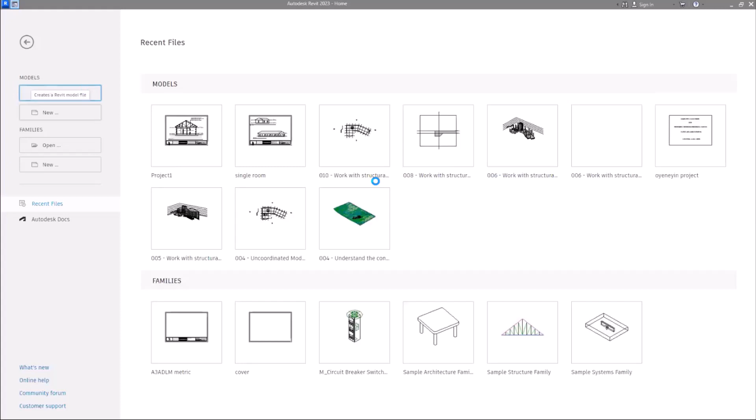Now let's open up and create a new file. For those that are new here, to open an existing project just click on open here. Any project that is not on this recent page, click on open, and it opens your documents, your file explorer. Pick the project and click open. Make sure they are all RVT files, Revit files. Once you click open, it allows you to open RVT files. Take note of that.

But for now we'll be starting a new project, so that was new. Remember, we make use of metric architectural templates for projects. It takes a bit of time to respond because it's a very heavy software, actually.

Okay, we are good. Now we'll pick up from where we stopped yesterday. I explained yesterday that we have the tabs up here and the ribbons down here. Those are tabs and ribbons. I'll come to the insert tab. We were able to discuss the first five tabs yesterday.

Now, under these inserts, this is where quantity surveyors would mostly work, or BIM managers, because at this stage you'll be linking various models from either your architect, your structural engineer, or your mechanical or systems engineer. Under insert here, we have the first ribbon aspect, which is link. Now we can always link a Revit file. Let's quickly try that.

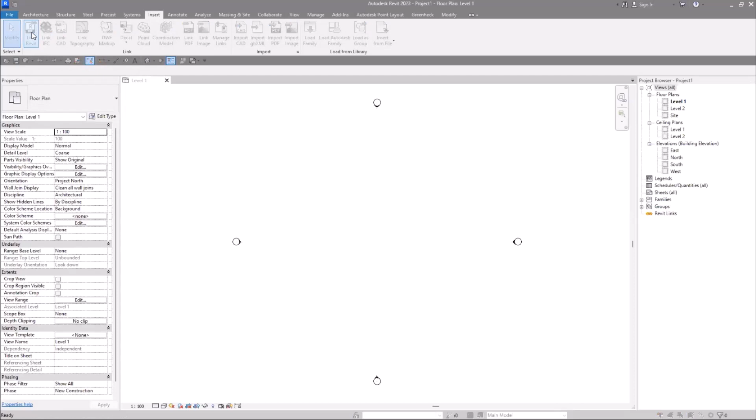Once you click on this link here, and you have an existing model, it opens up your file explorer. So I'm linking this simple project here. Let me just quickly link this concept design.

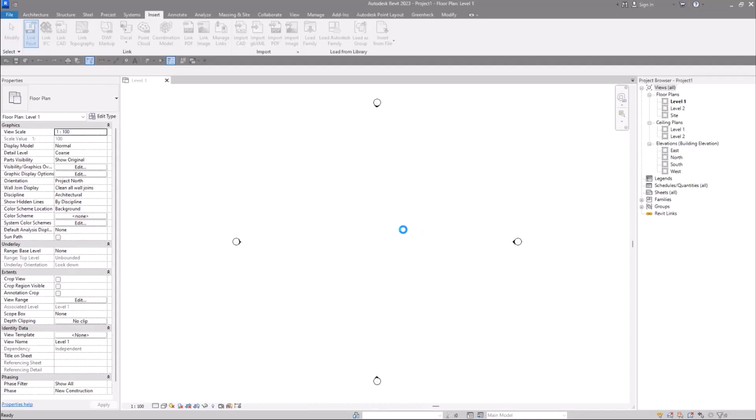Let me quickly open this up. Once you click on link here, it links it. So once you get your drawing, design or model from the architects or any other person, and you want to create your own separate file without tampering with the architect's design, what you do is link the model. So you see, it's not the model itself, it's a linked model you can use for clash detection and analysis.

You can now link the structural design and systems models also. You can link as many models as possible into your single Revit file. That is what link Revit is for. The other advantage of link Revit is that the link option allows your models to be live. I will explain more on that as we proceed.

Now let's look at the next option, link IFC files. I explained yesterday that IFC file is the standard of design put into place by the ISO, the International Standard Organization. There is 19650, which allows software developers to develop software that can easily collaborate and work within all software easily. For example, if the architect or lead designer uses SketchUp, you won't have to tell him it's not easy to complete an information-rich model.

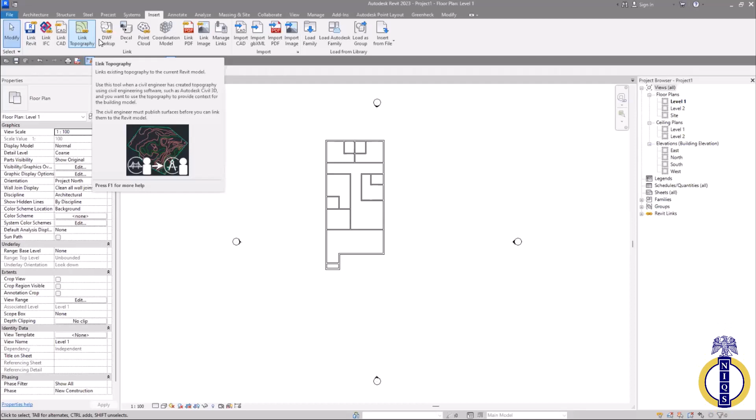Then DWF markups, that's a version of AutoCAD also. Then decal is image browse, you can always link that. Then you can also import from Point Cloud, that's the cloud of Autodesk Cloud space, that's Point Cloud. And you can link a coordination model.

That's the Navisworks document or Navisworks file. Once you have a model that's been saved on Navisworks documents or Navisworks cache file, you can link it up into your Revit model. So models created on Navisworks are called coordination models. You can take that down.

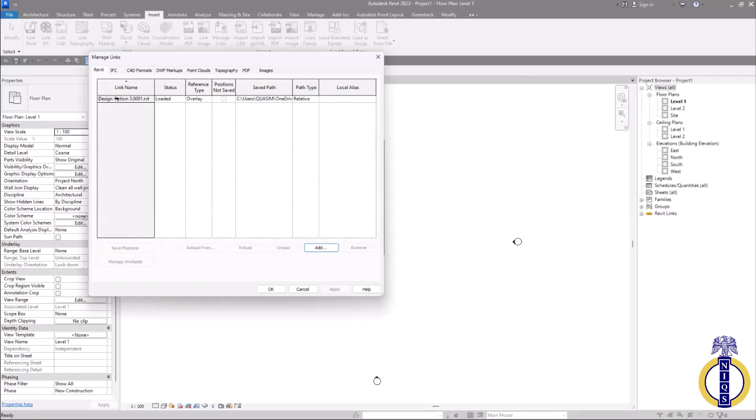You can link PDF files, you can link images, then you can also manage the links. On this manage links option, you will see the links for all the files you loaded. Once I click on manage link here, it gives this dialog box. With this dialog box, I can see the link model I linked, which is this Revit file. So I can reload it, unload it, or make some other adjustments, but that's a more advanced section.

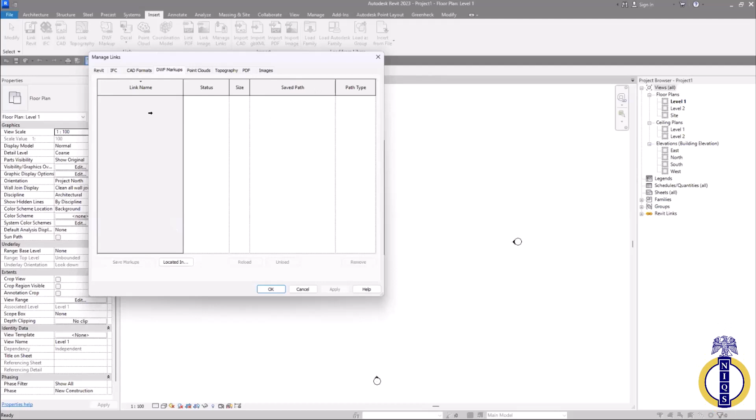Then IFC files also, you can do that, CAD files, DWF files. So all of that, you can always load them in and make adjustments to them. And we have the next aspect, which is imports. Under this import, you can import CAD file, GBXML, PDF, and image. Now let me explain the difference between link and import.

In an older version, you were able to import Revit also and import IFC, but now those feature options have been removed. When you link a model, it is a live model. That means the architect or engineer can go into the model from his own end and make adjustments. Once an adjustment is made on that model, once you open up Revit software, it will tell you an adjustment has been made on the model.

For example, after you've done your quantity takeoff or quantity extraction from Revit software, and then there's a change in design or an adjustment made on the 3D model by the design team, instead of going back and starting your quantification process from the beginning again, what you do at this stage is reload. Once you open up the Revit software, it tells you an adjustment has been made. You just reload it, and once you reload, it will update all your quantities immediately without any stress.

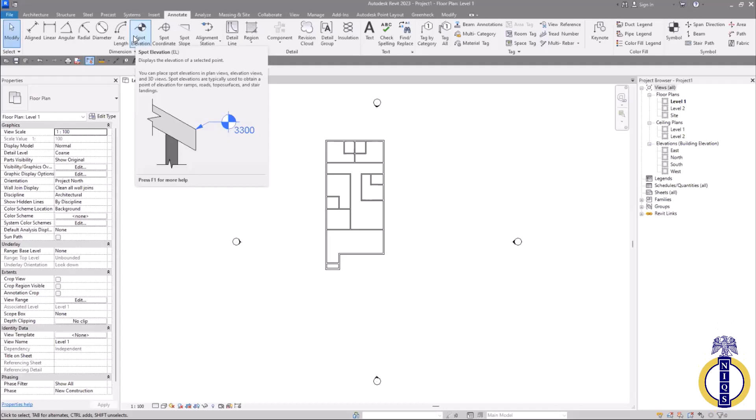Now, spot elevation. If you want to calculate the level of a particular surface from the ground level, that's the zero level, natural ground level, you might have designs where you have undulating floors, where maybe the living room area is at the normal 150 slab level, while the interior, the bedroom and all of that, is a little bit elevated to maybe 300 or 350.

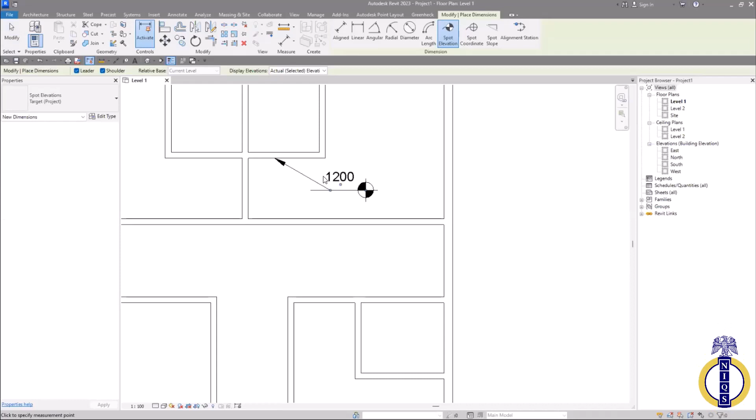That means that's affected the thickness at that point in time. So you can just use it to go through. Once you click on it, it will give you the feature. Once you just check, like for this, see my walls and all of that. So once you click on it, you can get the spot height for this building or these elements. Okay, that's just about spots.

Then the coordinate also, just to get the spot coordinate, works the same way as elevation. Then you can get the slope, alignment, and all of that.

Now for details, if you want to give instructions or notes, you can use this detail line here. Once you click on this detail line, designers use it for giving annotations. By the time we start making use of all of this, you'll see. You can just draw a bit of an arrow like this. Once you do that, just press escape to cancel.

You can also type a text here, and give the instruction you want to give about that particular surface to either the design team or anyone that has to do with that particular aspect, even the client also.

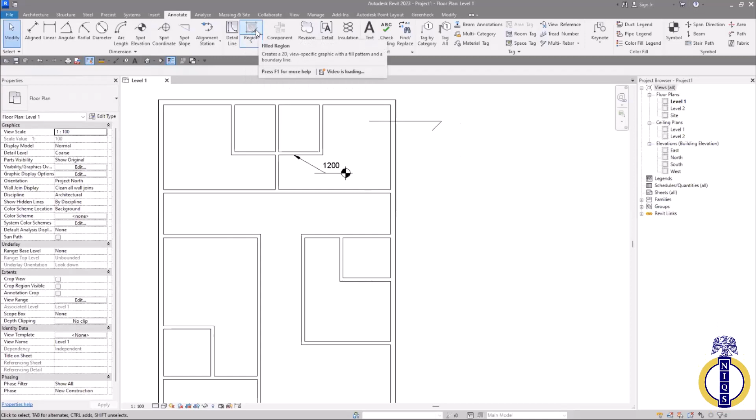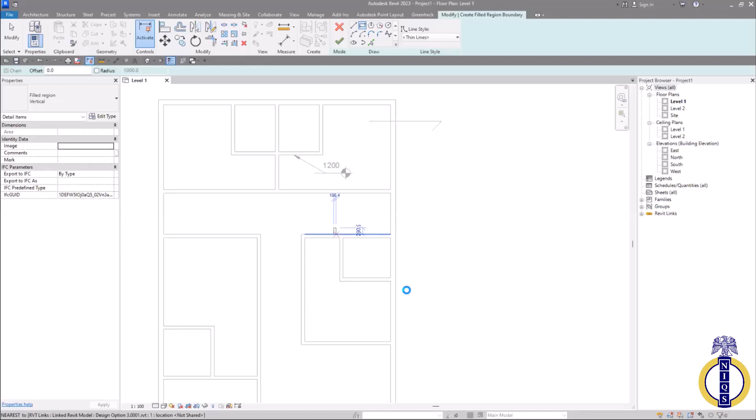They have region. This region is to shade a particular region. So if you click on this region here and click on this draw icon, once you click on any of these tools, it gives us a different page entirely, which will still come to, but I just want to quickly do a run through. So you can just click on this rectangle here. Let's give information about this region. I'll just click the first end and the second end of the rectangle, which is here. Once I do that, just click OK. And see, it's filled already. It has this here.

Now with this, once you fill it, you can just give a text, come down to text here. Just type a text and give the instruction about that particular spot or space.

Then we have the next tab here, which is text. Revision Cloud also is just the same as giving instructions. The model group, the insulation is used by the design team, mechanical team, to give insulation designs on the sections and all of that. Now text, quickly type on your 2D view or something.

Once you just click on this text here, it gives you this new cursor. You see the cursor has a sign, that's the text cursor. You can just click on the surface where you want to type and just type, closed area. So when this is off, just press enter and escape.

So see this here, once any other person in your project team or design team opens this up, say, oh, you've given an instruction, this area is closed or something. So that is one of the advantages of this detail annotate space here. You can always verify your spellings, word check, find and replace, and all of that. Just that same basic tools that Microsoft Word does, all of that has been integrated into Revit software also.

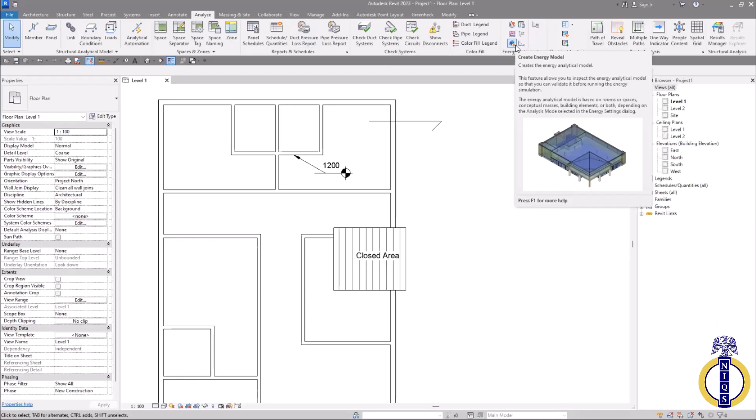Okay, when you're carrying out MEP designs and all that, the principles that will guide you in creating the air terminals and all of that is based on this energy model here, that's under energy optimization. Electrical analysis also, then path of travel for the design team.

The next tab we have here also is the massing and site. Now for massing and site, like I said yesterday, just to give a concept of what you want to design, conceptual mass. See those funny looking buildings that have very complex design, complex shape, and all of that. All of that were achieved all because the design team were able to design conceptual mass.

It is now from this conceptual mass that they had the other features of the particular design they intend to go about, as the floor. They can, after you've done the conceptual mass, you can now model by face. That's how your walls, your floors, your roof, and curtain walls. Just place it on the model that you try to design, and that is it.

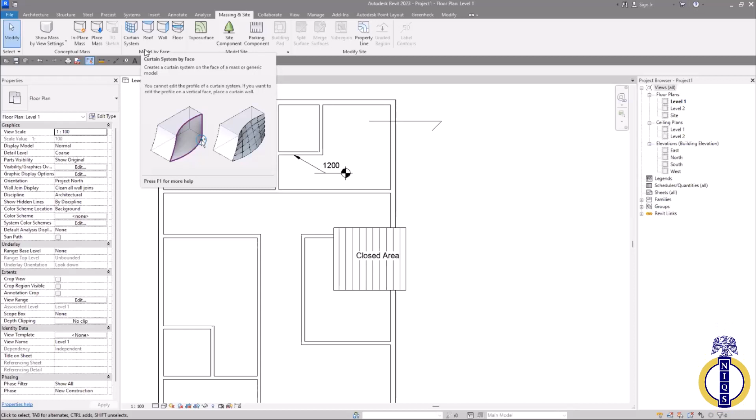From there, they start doing the interior partition and all of that. Now, model sites. This is one of the first things you do once you get your design. If you have to, after getting your brief, do a design, you have to try and model the site and all of that. So you have the topo surface, that's the site surface, site components like trees, chairs, and all of that. Parking components also. Then modify site, so you have a property line, that's your boundary.

Now collaborate. Like I said, Revit is one of the most powerful BIM tools. One of the major reasons is because of these collaboration features that it has here. Now, someone asked a question yesterday about how do you know who made adjustments to your model? How do you know who is working on that particular model and all of that?

Now under this collaborate, we have communicate. Now this is not a shared model, that is why this tab is inactive. For shared models, the communicate tab is always active, where you can now send your editing request to your BIM manager. Now there's a difference between a project manager and a BIM manager. They are two different people. A BIM manager, let me quickly check this in, is someone that manages all the designs and models on the construction project.

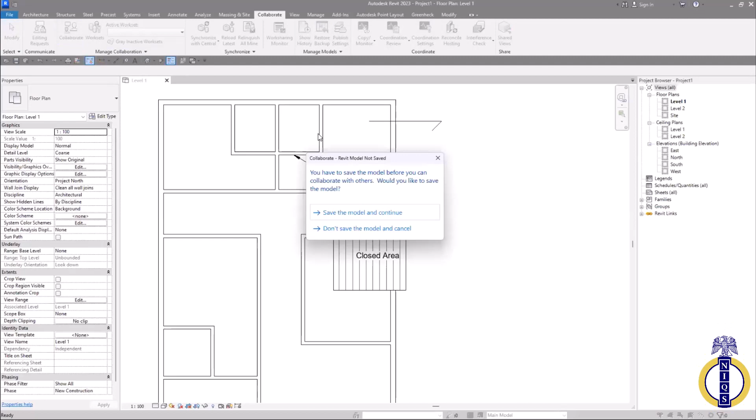You see, the model is not saved, so I have to save the model. Let me quickly save what we're trying to work on. Let me save the model. I'm trying to open this back up.

Okay, while we are waiting for the file to open, if you have any question, you can still ask the question so that we will continue from there. Please, Kasim, just hold on a minute.

No problem. I have QS Okechukwu Victoria. You raised your hand, you might proceed to ask your question if you have a question. Otherwise, we'll move over to QS Adegoke Akin. All right, QS Kasim, you can continue with the training, please. Okay, sir.

Taking a second to move on. Hello sir, yes sir, go ahead. Okay. This training we are into now, is it possible for a quantity surveyor, after maybe an architect sends a particular drawing, can he readjust a drawing for an architect?

Thank you, Mr. Adegoke, for that question. Yes sir, it is very important that in a professional situation or professional environment, it is not proper for the cost engineer to adjust a shared model. Do you understand? You have to send your request to the BIM manager on that project. So it's now the BIM manager that will send your query request to the architect or structural engineer to make adjustments to the model. So in a professional setting, there is usually a BIM manager, someone that you report to, that says okay, this is what has happened from the design team that you want them to make adjustments or to correct.

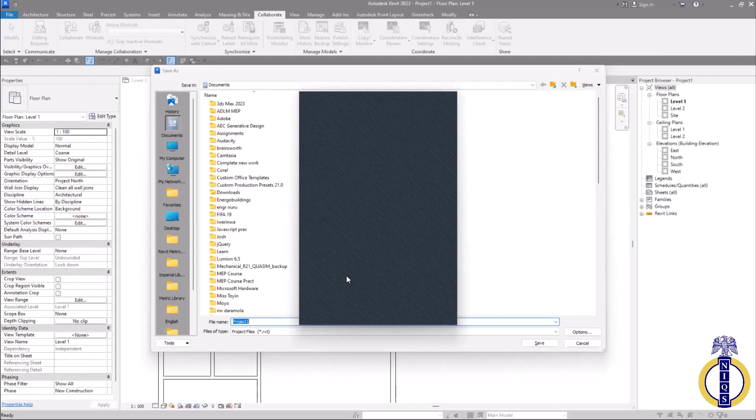So it is now the BIM manager - the architect also would have to meet up with the BIM manager or send a query request to the BIM manager that he wants to make adjustments on the particular design. So that way, once the architect makes the adjustments, the BIM manager sends to the entire team that, okay, an adjustment has been made by the architect. So once the adjustment has been made, then you can now move into that.

Let's proceed. Now I said I want to save this. Let's just save this file as NIQS training, NIQS FCT. Okay, so just save the file.

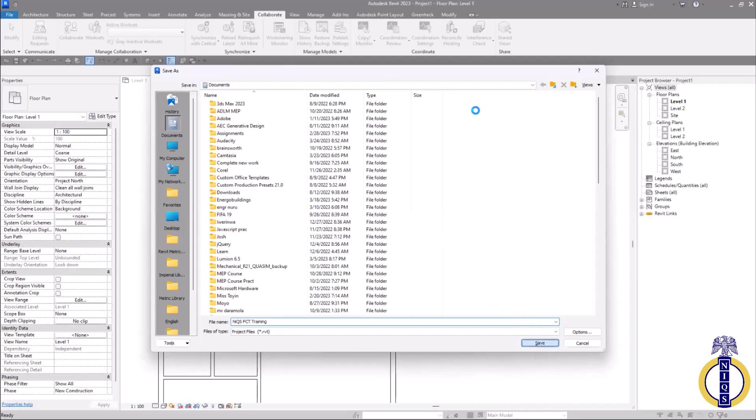And Revit is a very heavy software, so it takes a bit of time to load some features. Somebody actually asked a question that is very interesting that we note also. And that question is like this: he said his organization is using Microsoft Office 365, and he's asking, when somebody is doing collaboration in Revit, whether the person can also have access to it in Microsoft collaboration tools. It's important to point out that almost all of these tools have their own collaborative cycle, and those cycles are not overlapping. When you're collaborating in Microsoft Word or Microsoft cycle, it is different from the collaboration in other application spaces. So the collaboration cycles are not overlapping, they are actually disconnected because the applications are not the same and are not doing the same function.

Now, we were discussing the collaborate section before the break, and once we clicked on the collaborate button, we had to save the model. After you saved your model, this option came up.

Now we have the question, how would you like to collaborate? Is it within your network or in the cloud? Within your network is for organizations using a LAN network, that's a local area network. So everyone connected to your company's Wi-Fi would get to see that model on their Revit platform. That is within the network.

While within the cloud is if you have a situation where the architects or the QS or any other person are not within that office environment on that internet or network, then you can share on the cloud and the link will be generated for you to share your models with them.

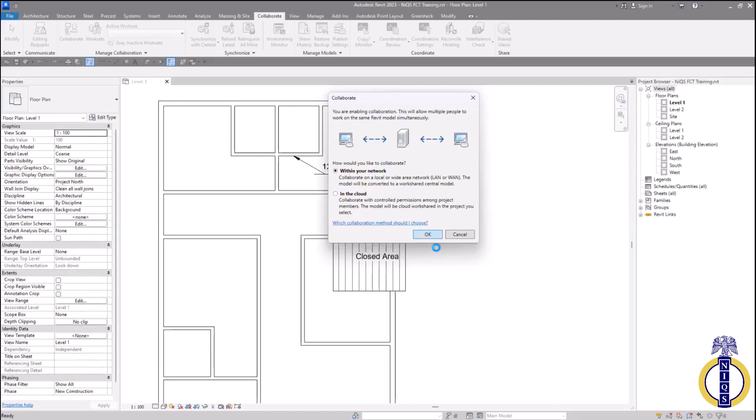So those are the two methods of making your models BIM compliant or creating a collaborative system for you to work with. So if you have within your cloud, just click this, or within your network rather, then next, to give you the next prompt.

That will be more of security features about the project. So once you fill all of that in, down here, once it's enabled on your project, you are good to go.

Now you see this sheet, it is no longer a dead model. It's now a model that can be synchronized across everyone within that network. Okay, now you can collaborate.

Now it's currently collaborated locally. Now you can see this edit request, it is now active. Initially it was grayed out, but now it's active because this model is now being shared.

Then you can now move this to the cloud if you want to. Then you have your work set.

Now you see this edit request here. If you are the BIM manager, once you click on edit request, you would see all the pending requests on that project. So you can either grant the request to make those adjustments or deny. As I'm saying, you are like the check and balance at this stage.

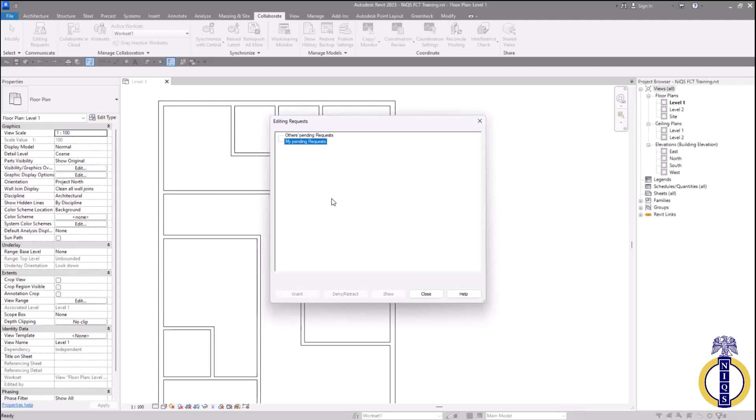Okay, then close. I have the next one here, which is worksets. Now that is worksets here, we have this sheet we are working with. Owner is me, this is your Autodesk user ID. This is what you're seeing here, so visible in all view and all of that.

So we have several worksets. You can share your grids for structural engineers, just share your grids to them. You can share your families also, you see all the families inside the project. Then you can share your views also, so you can pick what you want to share to everyone.

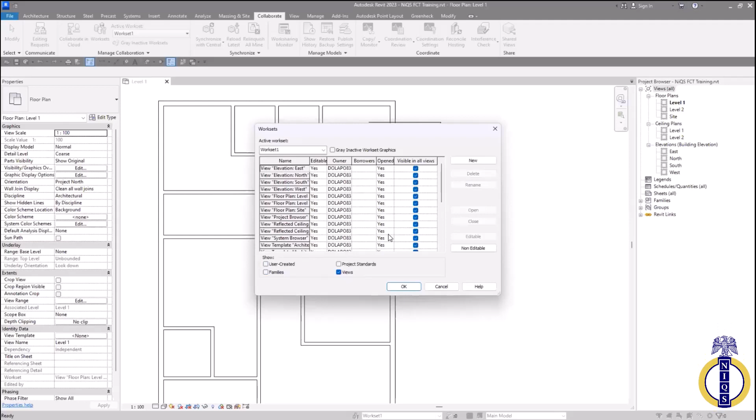So once you click on this, then you can share it. Now once you click this, you have the elevation, all the views, elevation down to floor plan, 3D views and all of that, they are all here. And the owner, that is the architect or who created them, and they are all opened. Do you understand? Now that's how to share. Just click OK, and this information is being shared amongst everyone on that local network.

Do you understand? Now we have this small drop-down icon here which shows work sharing, make editable controls. So once you turn this on, your project is being shared amongst everyone within your local network. While for cloud network, it will give you a link. Once you send the link to every other person, they download and use it for the analysis also for their design. That's for cloud.

Now, this is the central model, that is why this synchronize with central and reload latest is grayed out. Now if you are on the other side, that's the receiving end, where the BIM manager or the architect has shared a model link to you. Once you do your own analysis, that's you create your own 5D design on the sheets here, you can now synchronize with central.

That means the entire design of the model you worked with, once you synchronize with the central, you have updated everyone that you've done your own parts as the 4D or 5D professional there. Then you can reload the latest file if there's an adjustment made. Then you, as the one sharing, have to relinquish ownership if you want to.

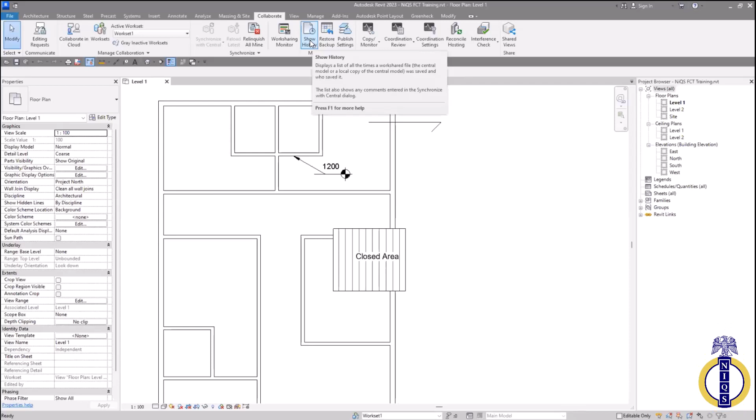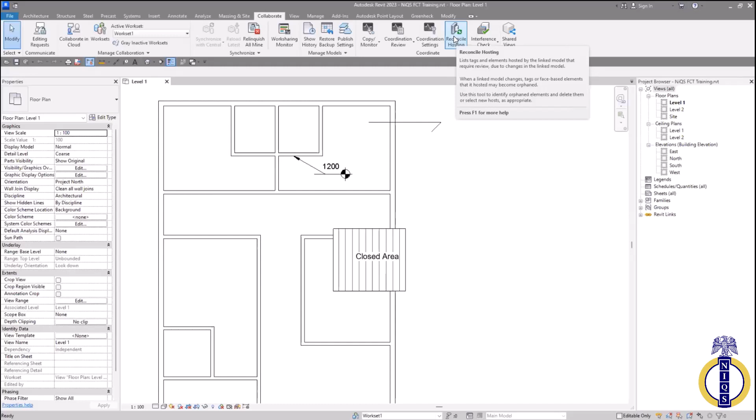Then as a BIM manager, you can create backups and all of that. It's a very wide experience. They can always publish your settings to the entire team. The other coordinates here can copy, monitor your project coordinate settings and all of that, so all of this is under coordination setting. As a BIM compliant professional, you should be able to have in-depth knowledge, but time will not allow us to go in-depth into everything because we have so many things to cover. But you will be able to have in-depth knowledge on how to use all of these collaborative features, setting up the cloud features and all of that within your workspace. It makes your work very, very easy, you don't have to stress about calling the architect all the time to send drawings. So as a quantity surveyor, your work is easier at this stage.

Let's move to the next part, which is view. Under this view, basically how to set your view, we are going into design. You have the view template, under graphics, how the view looks like and all of that. Then presentation, that's the 3D rendering and all of that. Under this create, you can create your own 3D view, sections, callouts, plan, elevation, duplicate, legends, schedules, all of that are created under these views. You can create various forms of view, your drafting view, that's for sketch, and you can duplicate your existing views also. Then for sheet composition, create your sheets that you want to compile for documentation to print out and all of that.

And we have windows here, various tabs in the user interface. Now come down to manage, which is the next tab. Under this manage, we have the settings, basically used by the design team to set the materials, the object styles, the project information. If you want to check the project information, just click on this. You can set the organization name, that is your company's name, the description of your company, the client, and the building name, that's the proposed residential building. Who is the author? That's the architect.

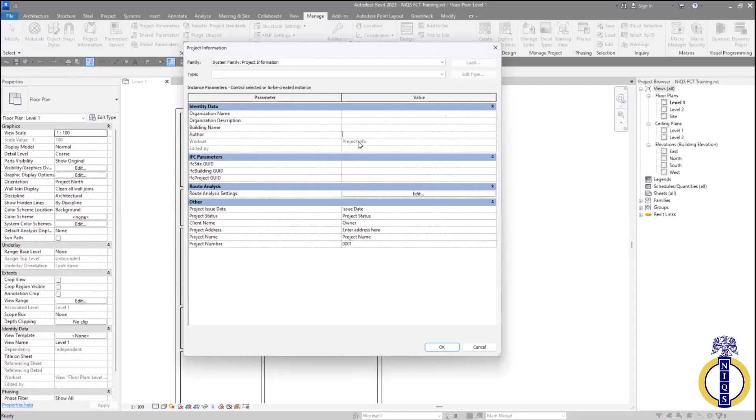Then IFC parameters, this is when you are sharing across various softwares also. You can input the GUID information also. Route analysis settings, the project, the dates the project was issued, project status, either completed or ongoing or at design stage, you can always input that. The address, the project name, and the project number, so all of that has to do with project information. Input all of this here, click OK. So your project doesn't just have a saved file with a name, it has all of the project information and parameters inside it.

It's very well, this is a new innovation.

It's not just the drawing aspect anymore, but the design team has to give an information rich model. You understand the definition of BIM today? It's the process of building an information rich model, not just designing randomly. Help you understand.

Now we have the project parameters, the shared parameters, and global parameters. Shared parameters are the parameters you are sharing with other design team members or other members of the project team. Global parameters are parameters you can get from the website or from the IoT, Internet of Things. That is where you get the global parameters features.

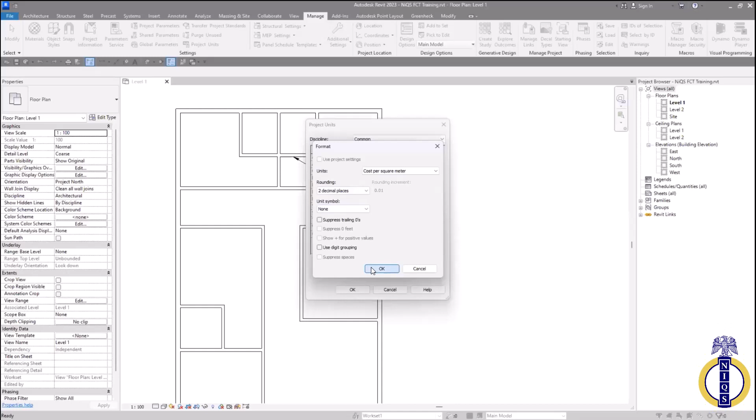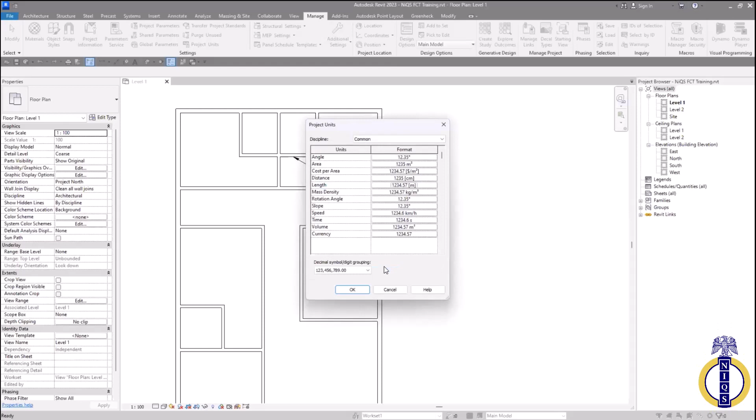So this is how to change the project's unit. If you received your project in meters and feet—let's say the design team designed and used feet, and you got confused when you opened the project in Revit—the usual solution is: just come to project units, under the manage tab, project units, then change the length, just change to meters, decimal place. You will now have a design that you are more familiar with.

Structural settings for structural engineering work, MEP settings, panel schedule settings for electrical panels, then other settings. Now there's also a project location.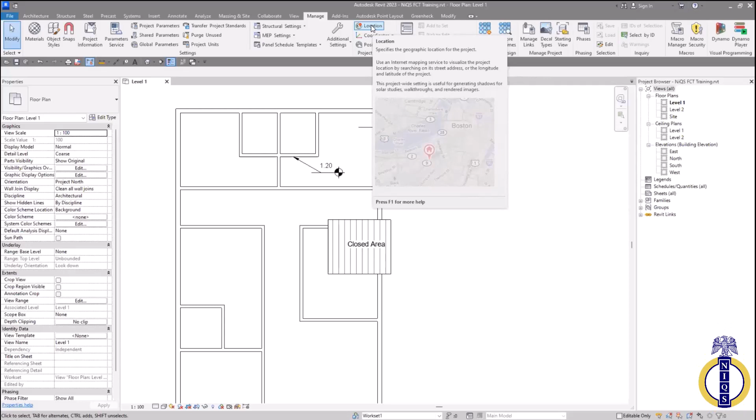Now another advantage of Revit 2023 and 2022 upwards is that you get live information about the site parameters, the site features, what is going on at that site at that particular point in time, satellite imagery and all of that. So once you are creating a design or project, you get in-depth location details, the most recent information about that environment, the weather details, the site condition, the floor condition—everything you get from the location details. You can either type in the coordinates, and it will take you there immediately.

Then the next part is position also. Let's move to the next part, which is the design options. This is usually used by the design team to make adjustments to your designs. Then generative designs, that's for advanced designs. We have manage projects, so you can manage your project links, the decal types and all of that. This is basically used by the design team, then the programming team also.

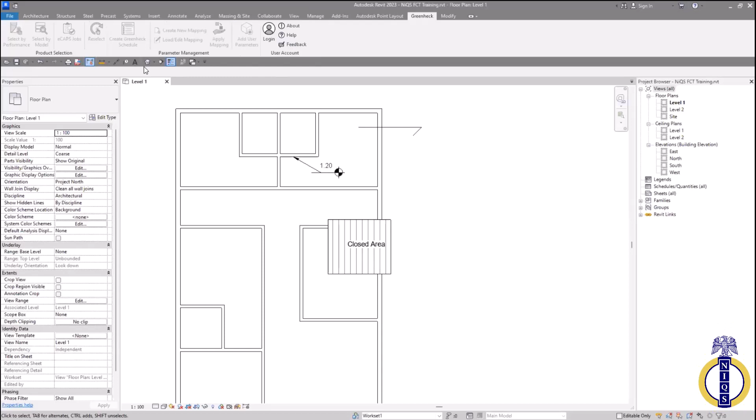Then add-ons—if you have add-ons installed, there are various add-ons that can help make your work easier and smarter. So we have various add-ons developed by various developers, and you can always purchase those add-ons or get them for your organization. This is Autodesk Point, this is an add-on here—Autodesk Point Layout and Greenbeck. These are various add-ons; Greenbeck is for analyzing sites and giving live information of those sites on my 3D model.

Then the Modify ribbon here is to make adjustments to the model. By the time you start working, you would see how that works. So basically, that is the quick run through about the project information.

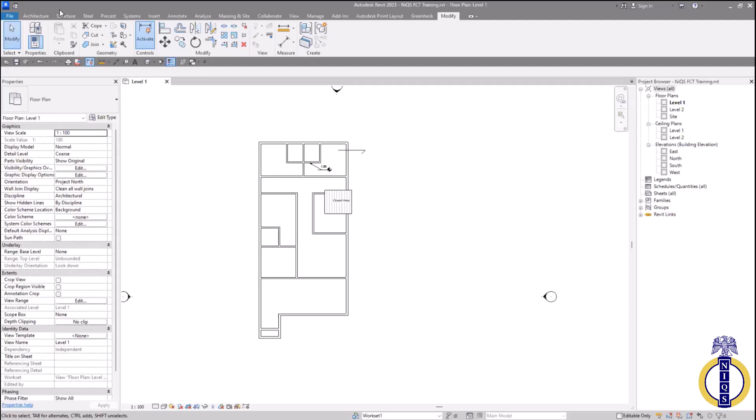Now we move to the next aspect, which is the properties panel. I explained how we got to this view yesterday. On the properties panel, which is on the left-hand side here, this is the properties of anything you are seeing currently on your screen, or any item that you select on your screen—you see the properties.

Now, this is the default screen view, so we have the floor plan level 1—that's the view we are looking at here. The scale of this page, the display type, detailing information, the visibility, and all of that. So all of this is usually set by the design team.

Now we will select any of this. If you want to select this, it changes. It's telling us we have the linked model here. If I select this spot elevation, it tells us we have spot elevation selected. Then we select this filled region also, and it's telling us information about the filled region.

Now we have the next part here, which is the tab. These are tabs of views that are open on your project. Okay, that's the tab aspect.

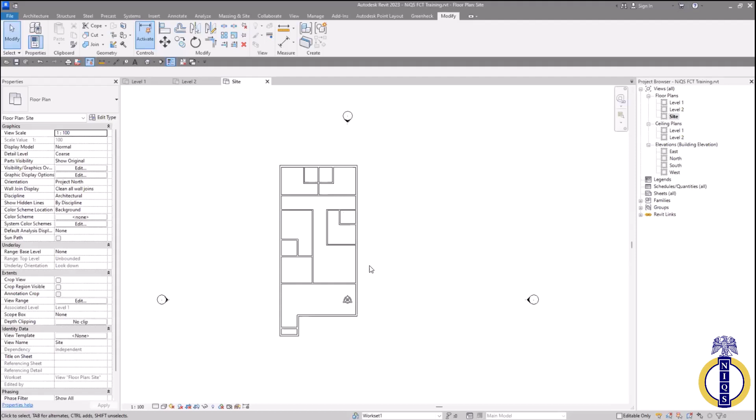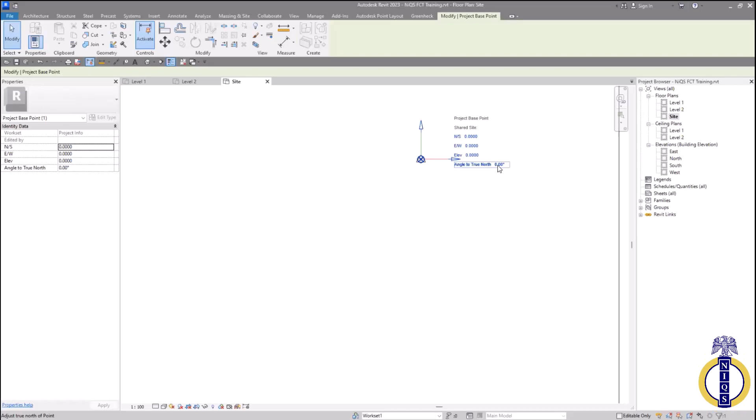Now under this site, I would like to call our attention to something. See this small box here, this icon here, this is called the spots information, that's topography information, coordinates. You can set your project coordinates, north, south, east, west, elevation from the natural ground level. Then is it true north, or is the building angled around the true north region and all of that? Once you set all of this based on your survey plan, that's your survey information.

Once you type all of this here, you can easily get the live views of how your project is going to look like. Now we have the ceiling plan also, level 1 and level 2 for ceiling plan.

Then under elevations, we have the 4 elevations here, which is the east elevation, the north elevation, south and west. Now you see these icons here on your plan, that's on your workspace here. You have 1, 2, 3, 4. This is the north elevation here, the south elevation here, then your east and west. Those are your 4 coordinates, and those are your 4 elevation views.

Now, always try and make sure that when you are designing, your design has to be at the middle, within all of these views, so you'll be able to capture all of the elevations easily.

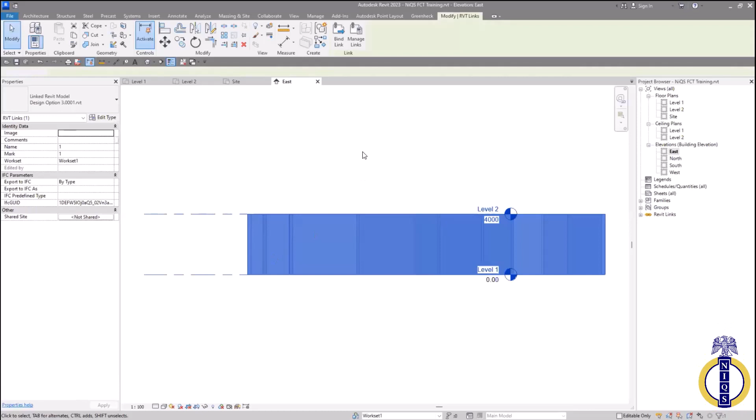See, if I come down to east, just double click, you see this is my east, this is the linked model. So this is my east elevation, north elevation, south, and west. So those are the 4 coordinates: north, south, west, and east. Now under this here, I want us to see something here.

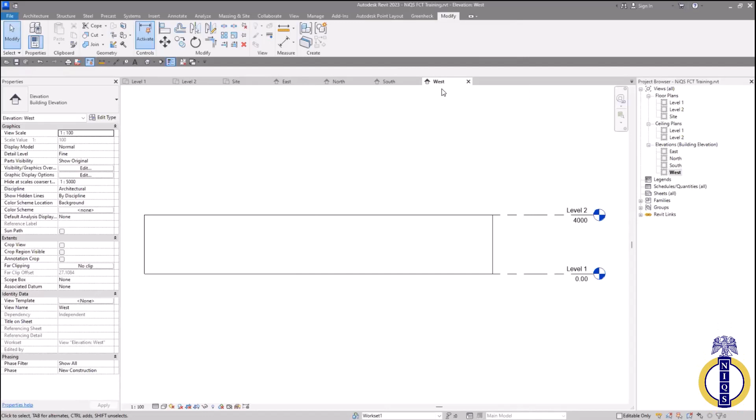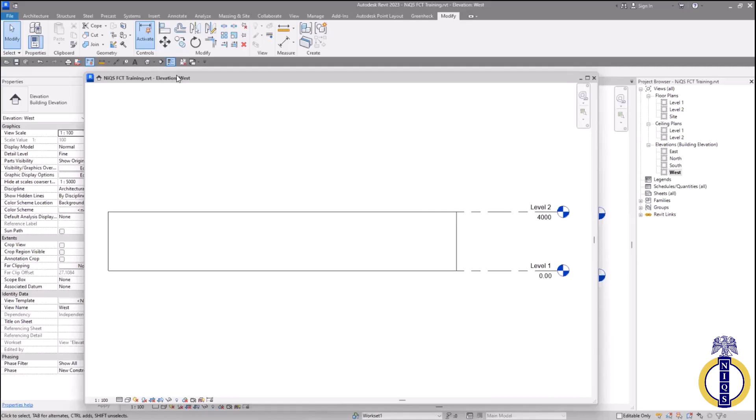Another advantage of this tab system is you can easily left click, drag, and pull out a tab. I see it's like a window on its own here. So for those of us using a multi-screen setup to work, this is what you would use even when you start doing 2D takeoff with Plan Swift and others, even if you're using a multi-screen because of ease or to reduce the workload or get more level of information, you can easily drag this new window to the next screen. So once you're doing something on this screen here, it is updating on the other screens also. That is like the beauty.

So all you have to do is click on these tabs and drag it out. Then if you are not using any of them, you can just close the tabs, because if you have too many open tabs, it may slow down your system also.

Now we have the next part, which is legends. Under this legends section, you see all of the legend information that has been created. Schedule and quantities is our field. After you've done the design and everything, you can create all of your quantities for every element in the building. You'd see all of that under this schedule and quantities here.

Then sheets for documentation. Families, all families have been created. Revit by default has thousands of families, thousands. So don't be surprised that this software is worth over 13 gig. The families are so enormous, they're so much. It's a very strong software with so many features for everyone. Then we have groups, the model group or the detail groups, and also we have the Revit link.

Now let's quickly do a quick practical here. You see this design, this is Design Option 3.0001. I want to quickly make an adjustment to this. So I just right click, then open. Let me just open this. It's not a collaborative model. I want to show you that once an adjustment is made under these Revit links, it would show you something.

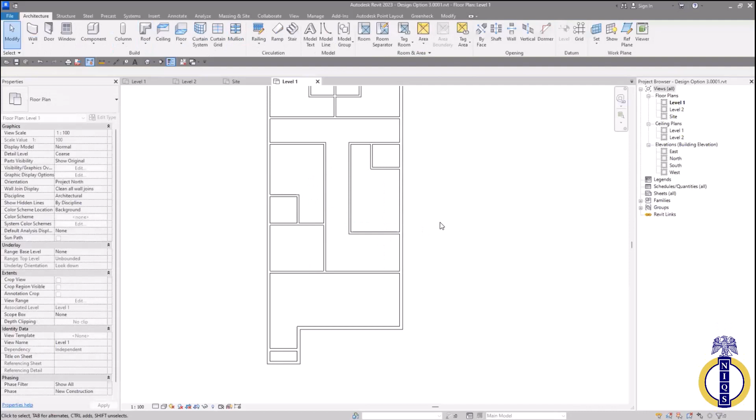Now we have this here. This is the model itself. You see, we can select any of the components. Let me just try and adjust this here. Then just press Ctrl S. That's to save. Yes.

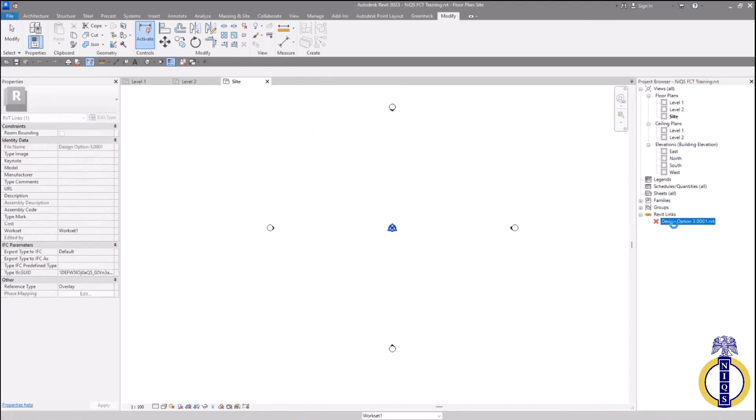Okay, once you've saved that, just close. Then you come back to your model that you're working on before, that's the collaborative model we're working with. See, we have an X. This X means there's something wrong, it's closed already. Okay, just right click and reload. Once you reload like that, it brings the model back.

So in case you have a situation where you are trying to work, or you worked on a project or a model and you can't unload, or you opened your file and you realize you could not find the link to the model, all you have to do is come back to Revit links here and reload it, and it comes back to you.

Okay, so that is all about the features of the Revit platform, which is the second stage of our part 1 lecture as stated yesterday. So any question on this part before we move to the third stage, which is the simple 3D design?

Thank you so much. I think we've got some reactions based on what you have talked about so far, and I would like you to listen to them and know what you can say about that.

The first one is from Emmanuel Ayodele. He says, okay, kindly expatiate the innovation of BIM. The innovation of BIM is to aid professionals to work smarter. But what should a contractor QS do in the scenario where a set of design, the drawing in question, received by the designer to be worked on misses several informations, and yet there is a timeline for the QS to make submission for tendering purpose?

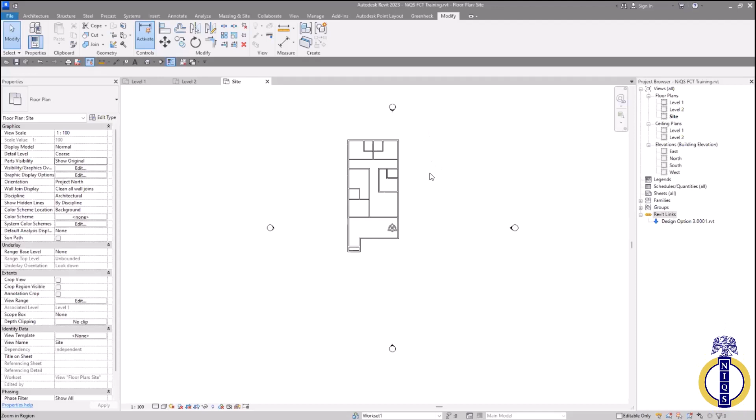Okay, so that will be all for the questions section. Now for this, let me unlink this model here because we won't be making use of this. Click on the model, unload, remove. Okay, so we no longer have this anymore.

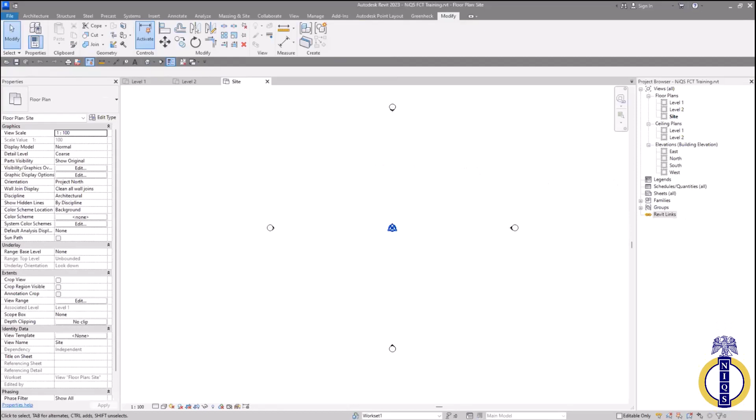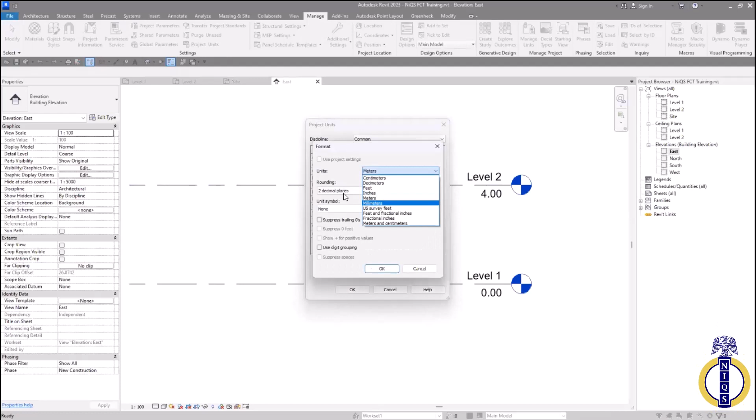Now, for you to prepare your design, the first things you have to do, that's like our checklist. First, you come to the elevation. Under this east elevation, I'm sure many of us will have this in millimeters. Let me come back to what everyone would have, which is in millimeters. So I'll come to manage here, project units, then length, reset to millimeters, 0 decimal place. This is what everyone should see on their elevations.

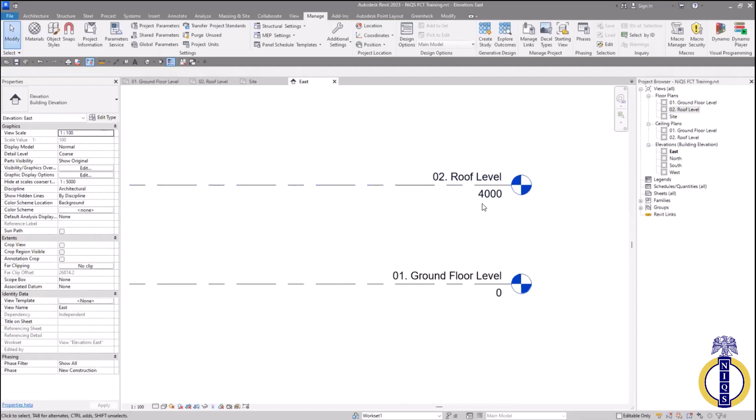Now, at this stage, you have to set your levels, your natural ground level, your roof level. It's a simple bungalow design you would want to design here. So you click on level 1 here, click twice to highlight this, and I can just change the name to 01. ground floor level. Then the next part, click here, 02, roof level. Now you see once this is here, the plan name has changed, also the ceiling plan has changed. Now for your height here, change this from 4,000, just click on this 4,000 and change it to 3,000, that's 3 meters. Now that is the first thing you do.

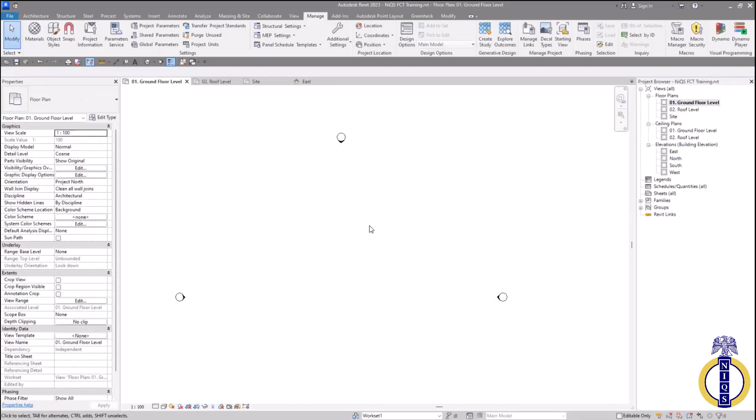Now coming down to your design here, come to the ground floor level. Let me delete all of this that we did earlier, I'll just highlight and delete. Now on the ground floor level, come to architecture. We want to create a simple 2-bedroom bungalow building, very simple, no stress at all. Come down to walls here.

Now that is walls. Once you click on that walls, it activates another set of tools for you. Under this here, we have the forms of wall.

You can use the line tool to draw a straight lined wall, draw a wall from square or from a polygon shape, or from a circumscribed polygon, circular arc wall, 2-point arc wall, and spline wall with lines and all of that.

So you have various forms which you can use to draw our walls. So be using the line format here, that's the line system to draw the walls. Now that's modify or place wall, now the height of the wall. Make sure the height is by default unconnected. You change this to the roof level, so the wall is coming from the ground floor level up to the roof level.

So you ignore the value you see here. And the location line is center line, that's the wall center line. Then chain is for continuous wall, which is what we are designing for, so you make sure this chain is turned on here. Then offset is 0, then leave this as it is. Join status, make sure you allow join, so you leave all of this.

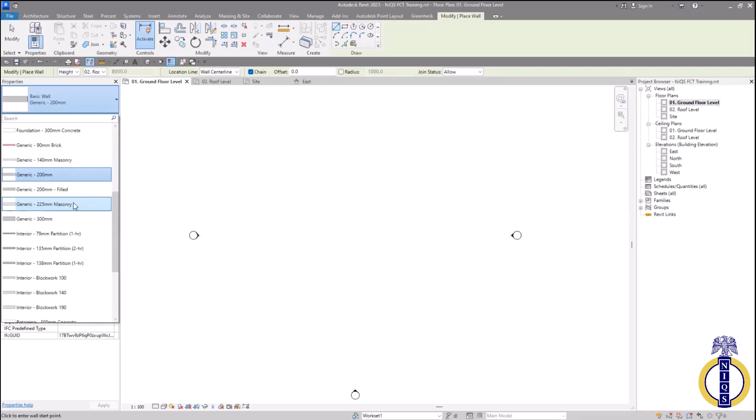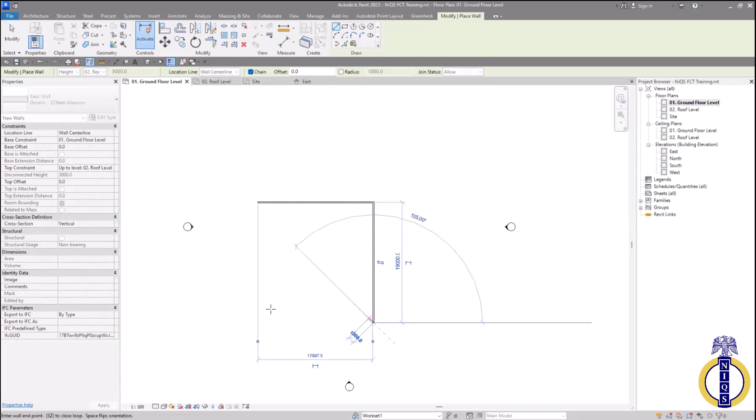This what we have here is what we've set up here also. Now, this is our workspace here. I told you we are working in the middle. So all you do is click on the first point, then just drag like this. We'll adjust the dimensions later. We also have to just have the layout of what we want to design.

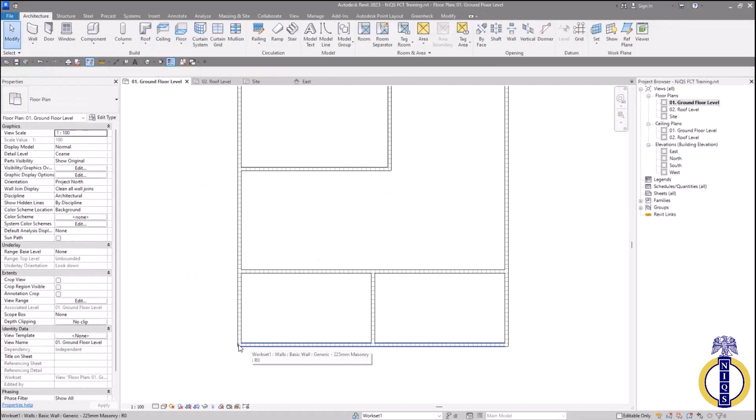Okay, so let's do a quick cut here. Don't mind my design, just something simple, just for you to understand the concept. So what you just do is you click on each of these walls to make adjustments. I used it to 225 for interior walls, but I would come back to show you how to edit that. Now for this here, the exterior walls now is 225 masonry walls. That's the thickness of all of these walls you are seeing here.

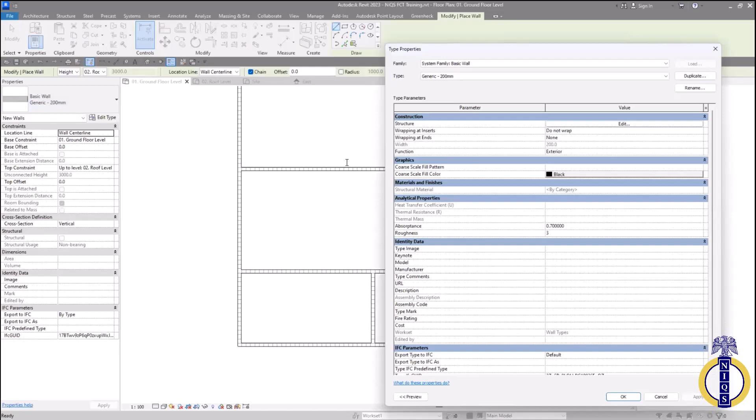For the interior, it is supposed to be 150 generic wall. I'll click on this wall again and click on walls. You can see once you click on walls here, you click on this basic wall and you come down to then change the name here to generic 150 mm. So that is the name of this wall here. Then come down to edit.

Then the thickness, you see this here is the thickness you just want to change here. So you change this thickness to 150. Then click on OK. Now you have this here. Then click OK.

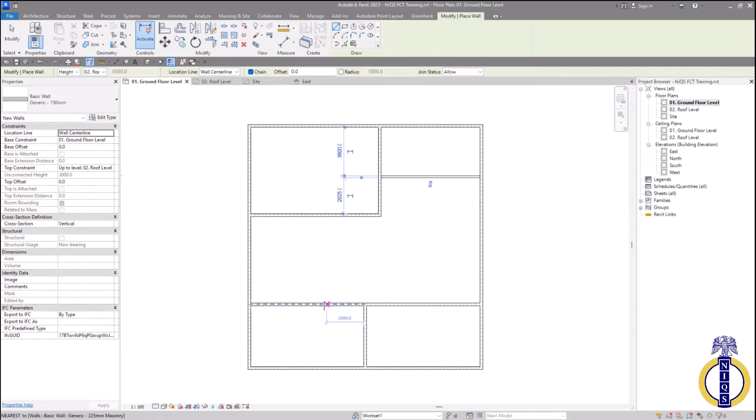Now with this here, you can now click on the next point, which is from this point down here. Once you want to click on the first point and click on the second point, it stops automatically. If you click on the first point, something like this, and you click here and it continues and you want it to stop, all you just do is right click, cancel. Can you see that? You right click and cancel. And let's say you are done with everything, you just right click again and cancel. So that shows that you are done.

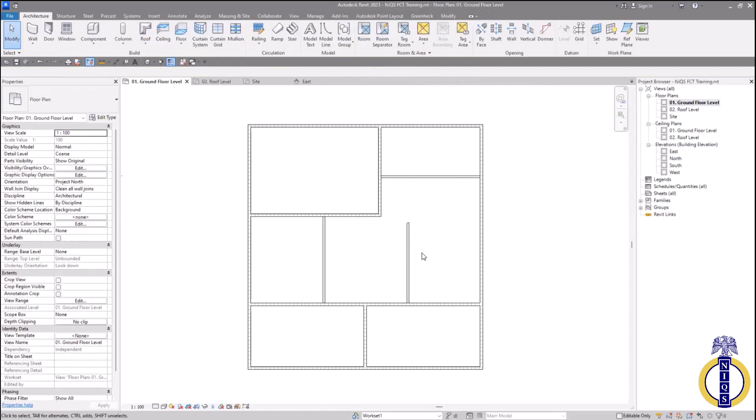Then also this, you highlight this also. Then you change this to 150 mm walls. So that is how you go about that. This is usually based on your idea or your sketch that you want to produce or you want to bring to life.

Okay, once you click on this, you can adjust here. Click on this, then adjust here. So we have the simple interior view dimension. Now see these walls here, they are too big. We don't even know the dimensions, we just cut randomly to achieve what we have here. Now, for us to manage or create something more mature than this, we have to adjust what you have here.

Now, for us to do that, you can come to Annotate, then Aligned Dimension, under Dimensions, Aligned. Now you pick. Once you click on that, it gives you this dialog here, and you see this part here, this area is what it gave you. Now what you do is select the wall center line and change this to wall face, and that way it allows you to select the wall faces.

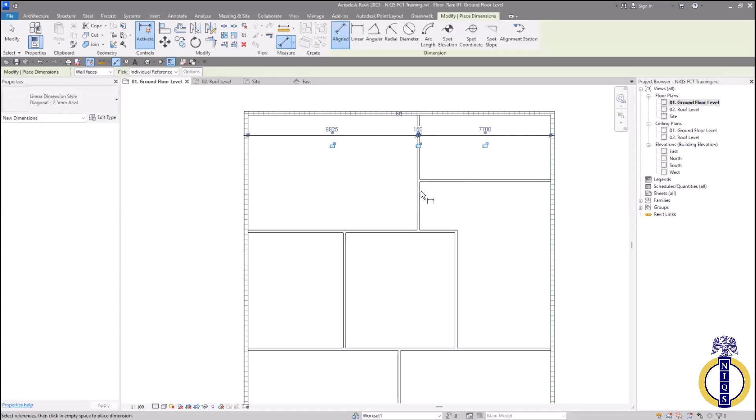So you pick from, just click once, then the next point, then the next part of the wall, then this. Okay, so I just quickly pick. Once you are on the face of the wall, it gives you a blue highlight. Can you see the blue highlight there? That shows that you selected the faces of those walls.

And just quickly use this to adjust. So this is the very fast way to go about your design, simple design. Let's say you made a mistake like this and you want to make adjustments, just adjust it here. All right, click then cancel.

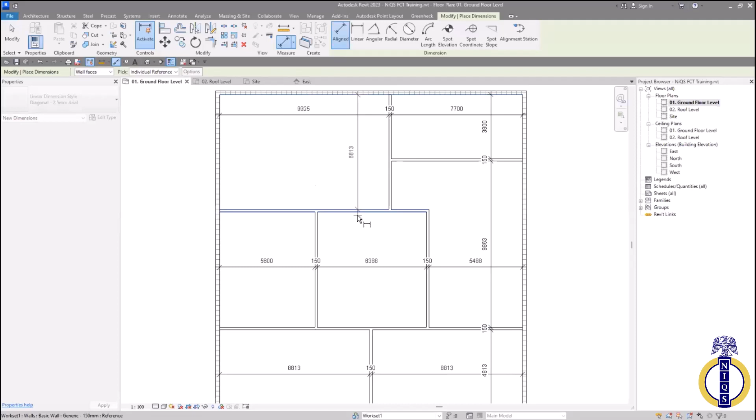So you click from this point here down to this point. Once you select all of this here, then this point, then select. Okay, now at this stage, you've added dimensions to all of your building models here.

Okay, now once you've added all of this here, you can make adjustments and edits. Now our rooms had to be 3 meters by 3 meters. Yeah, so you see this here, this is supposed to be like the master's bedroom, which is currently at 9 meters here. So you select this and you change.

Now you see, once you select any of the walls, this dimension becomes blue. So you can easily pick any of these values and change this. Let's say 3,6. Another principle is, if you are adjusting from the left, make sure all your edit goes to the left, and if you're adjusting from the right, make sure your edit goes towards the right. I hope you understand, just take note of that.

We'll come to the next part here. We'd adjust this, this is like the toilet. You can just make this 1,800. Okay, then you come down here also. Let's say we have another bedroom here also at 3,600.

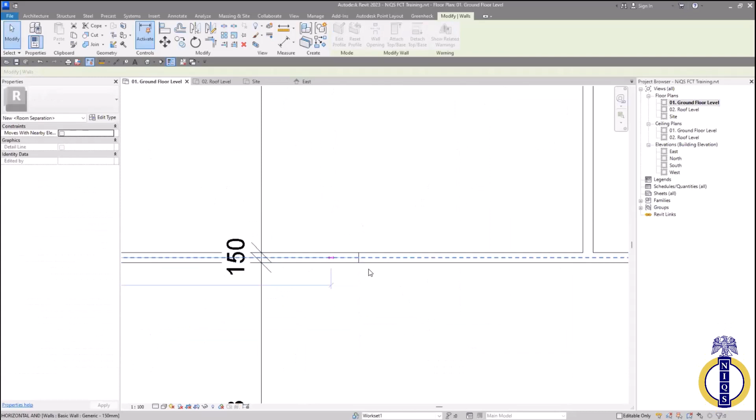Yeah, unjoin elements, see this here, this is because we had 2 different walls together here, that's why you had this. Now, that's for the first one. Now we adjust the internal walls also. This is the bedroom, so this can be like the lobby, the kitchen, then sitting area.

So adjust this to 500. Okay, then change this here also. So 4,200. Can you see it is taking a little bit of shape right now?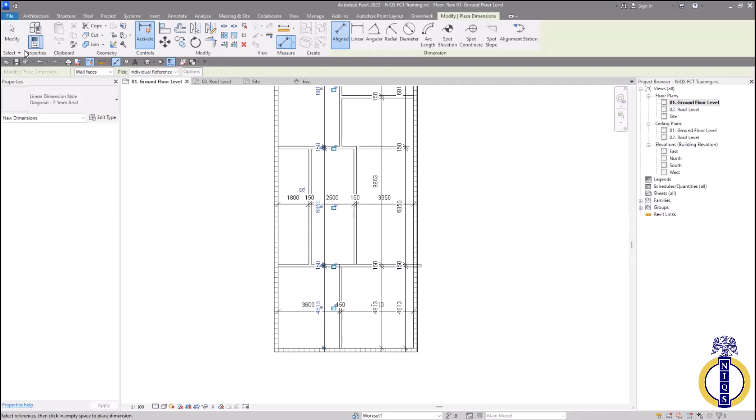No, we don't have vertical dimensions here, so just come down to Annotate, Aligned. Let me pick. Once you've selected all of this here, then once you pick on this, you can change this also to 3,600. It gives you this notification here, can you see this? Just unjoin, don't worry about that, you will adjust it later on.

Okay, then for this aspect also, click on this, then you adjust it to 1,800 also. Then this changes here, so let's say 2,700. See that one? You see it's now adjusted inside.

So this is how you just do a simple adjustment till you have something that you need and you can work with. Then this should come up to, let's say, 2,100.

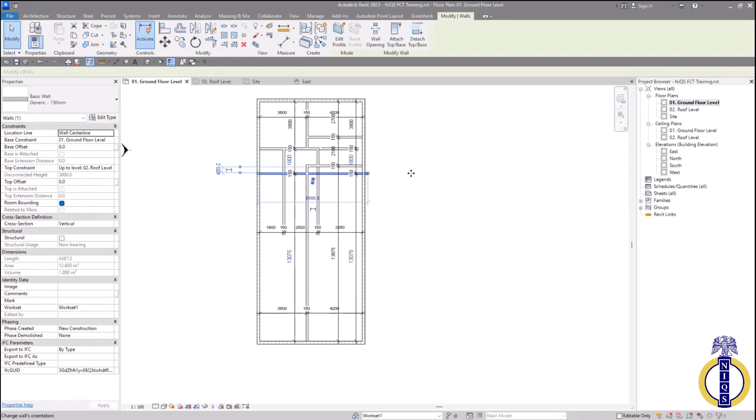See this wall here, I just adjust this to the back. But I just picked the node here and adjusted it. This is called a node, this point here, and I dragged it back. Okay, then I'll adjust this here. This is 13 meters, which is very big. Like 3,600 also. Enter.

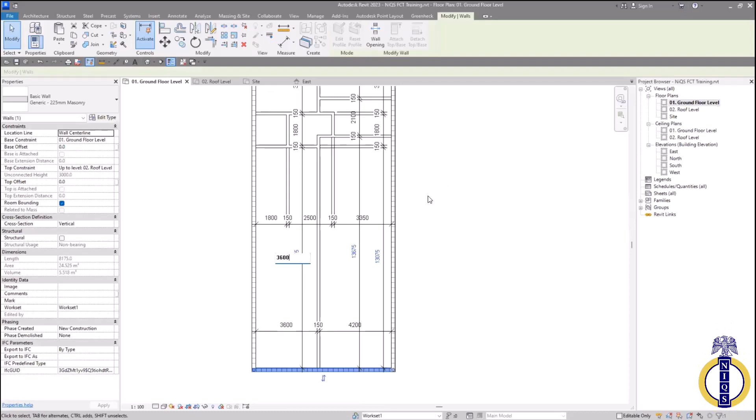So let's see where I think our design is taking shape now. See, it's now smaller and more reasonable than the way it was before. Now, once I'm done with this, that's the first field of dimension. I'll just click on any of the dimensions and right click, then select all instances in entire project.

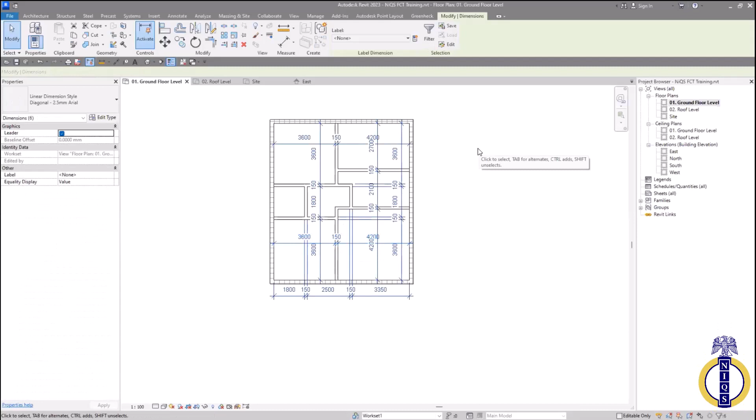Then I'll delete it because that's just the initial dimension. Okay, so I have this room, my sitting room, kitchen, then a kind of lobby here. So this toilet is for this, while this is a general one. It's just a very simple concept, or you can always do yours.

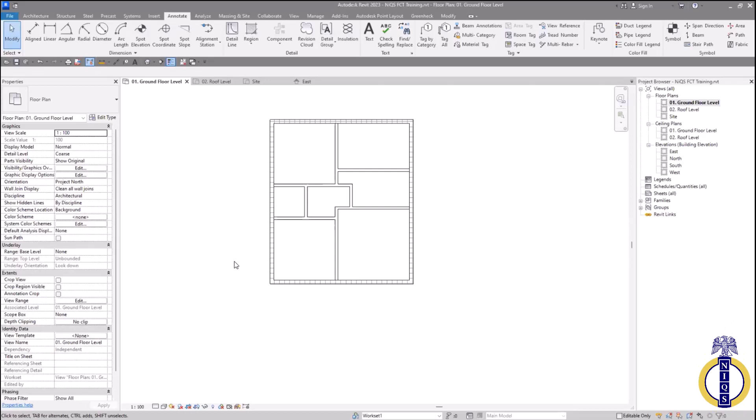So once you're done with the first part, which is the dimensioning and all of that, we'll move to the next part here, which is addition of simple elements.

Now we want to add doors to our model. We're making use of the default door in the library. Okay, so click on door. Now to click on door here, it gives you this. Now under properties, one more time, you'd see that we now have doors to deal with. Initially we had just walls to deal with, but now we are on doors, so it's giving us just doors to deal with. Now click on this drop down here.

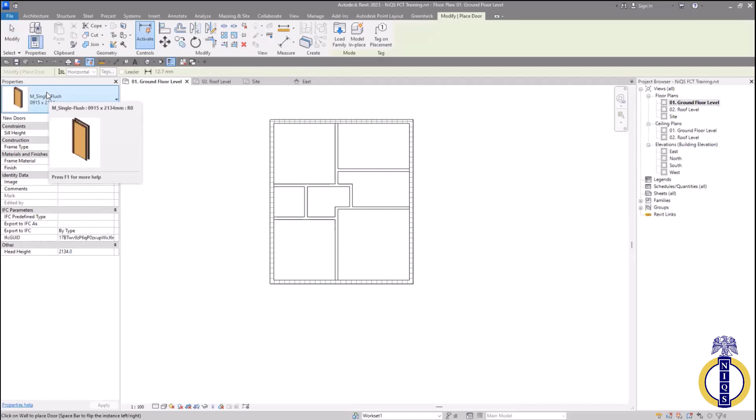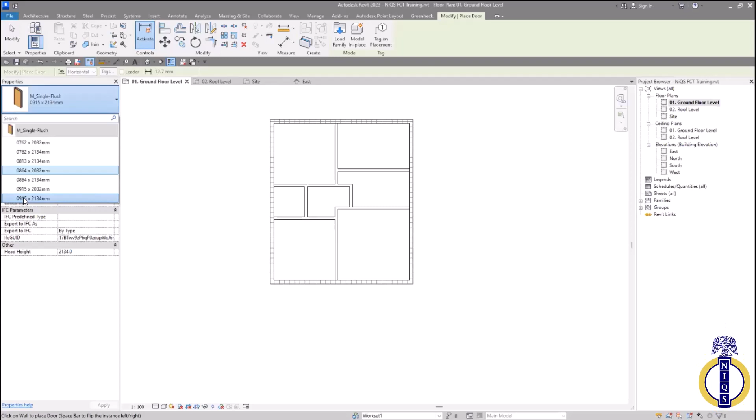Now click on this drop down. We have various sizes of doors here. We have the 750 doors, the 800 and 915. But you see all of these doors, they are in feet, or we don't have the kind of door we need. A 750 by 2100 and a 900 by 2100 door, which we don't have here, right?

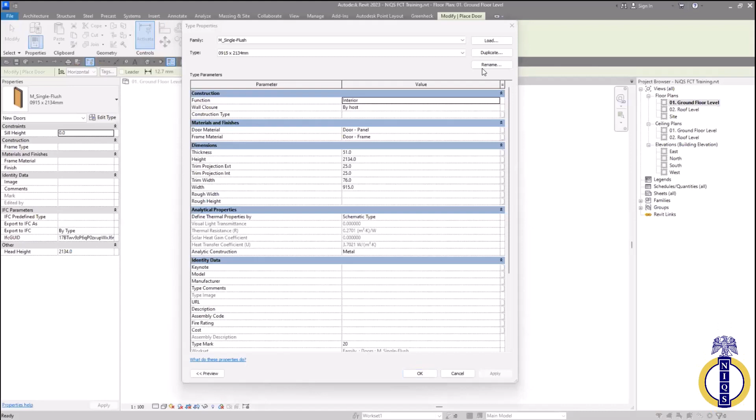Now what we do here is come to edit type. Under this edit type, you will duplicate. Once you duplicate, you have the door here. Okay, so once we have this here, that's 900 by 2100. Okay, now in millimeters, make sure it's in millimeters.

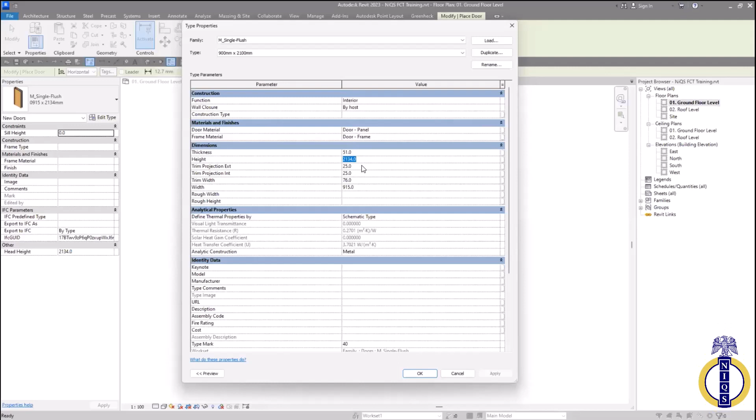The function of this door is to serve as interior doors first, just interior door panel frame. Now under dimensions here, you come to the height here, then you change it to 2100. Then the width also should be 900. Then click on OK.

Now with this here, you can just add your doors. You see there's something wrong with our design here, but we'll make adjustments to that very soon. So just add the doors here. That's the first door, will be here. I just put the doors here and move this. So this will be the first door. Then the second door also will be here.

As for the 900 door, then I can remove this wall here to make the space open. Just delete, then I'll click on this, then adjust the node. Come back a bit for this point here. Okay, I think we're good with this here.

Yeah, then we need a 750 door also. So I'll click on door. I can see that once you click on door, the properties changes to door here. Just click on edit type. Now with this here, I can now duplicate this and change the name to 750 by 2100. Remove this off. Okay, so I just change the width rather at this stage, so 750. And okay.

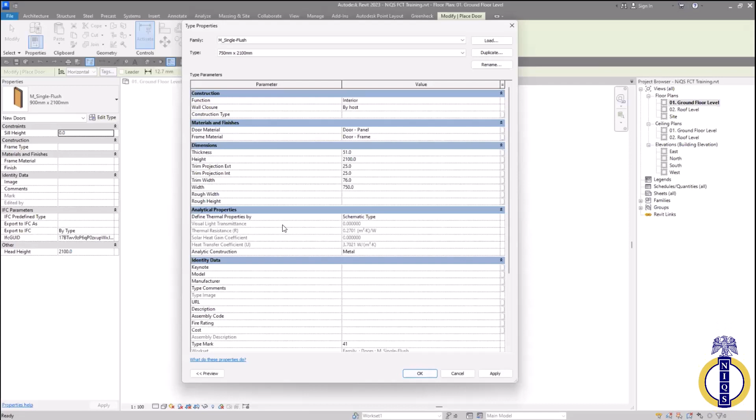We have this here. Okay. Now for this here, we need to add sliding doors, which we don't have by default. Okay, now what we do is come back to doors.

Now I have to load family this time around. See this load family that I've been seeing since, and this is how it works. Once you click on load family, you'll be able to open up some or load some default families for this project. So I need a sliding door.

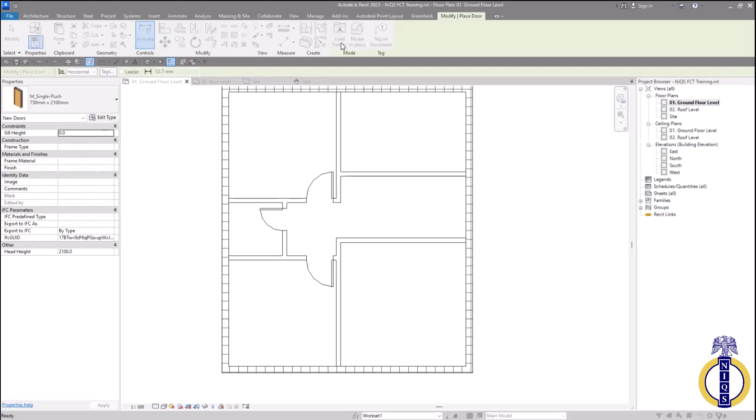So I have to check my library for a sliding door. The families that were used also on this project that are not available will be made available to you also via email for you to practice while you're practicing your own. Okay, so every family that was used for these projects that we are working on would be made available for you via email.

When I come back to door, yeah, okay. Now once you open doors here, we look for the sliding door. Let me check where our sliding door here. Okay, yeah, this is it, door sliding. Okay, then open up.

Okay, so this is the model that is trying to upgrade itself. It's coming from, I told you, we upgrade, it upscales, not downscales. So this family was created with Revit 2009. It's a very old family, so we are bringing it up to 2023. So even though your model was done with a very old version of the software, you can always upscale it. Okay.